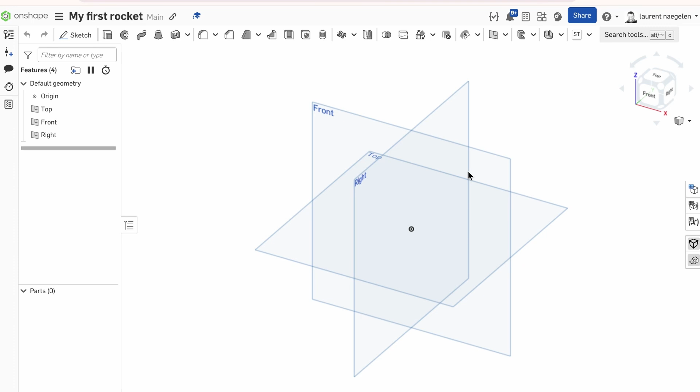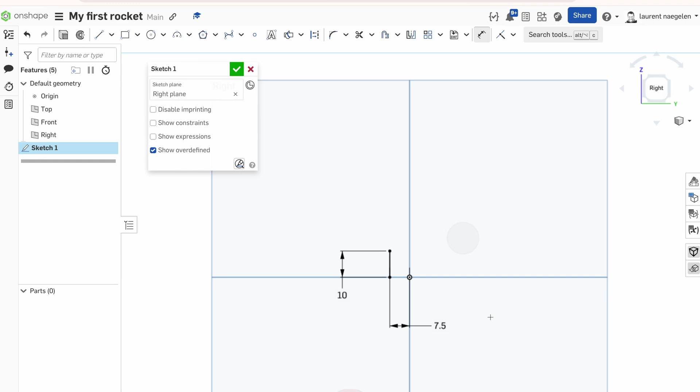Let's create a new Onshape document. First, draw the profile of the rocket body in a new sketch. Put a height limit to the body with a horizontal construction line.

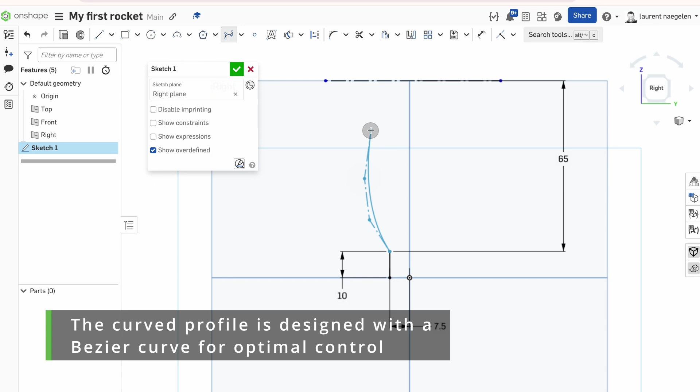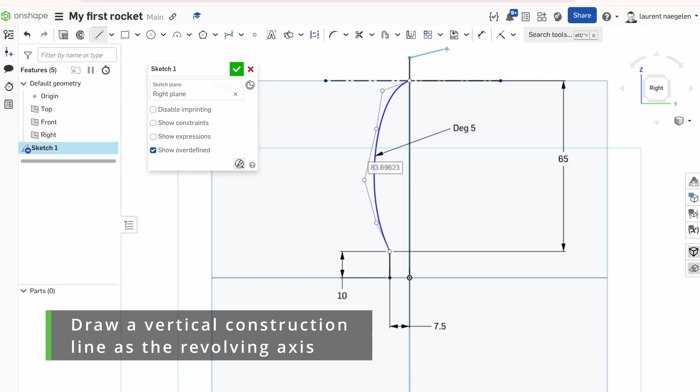The curved profile is designed with a Bezier curve for optimal control. Draw a vertical construction line as the revolving axis. We use a thin revolve function to create the rocket body.

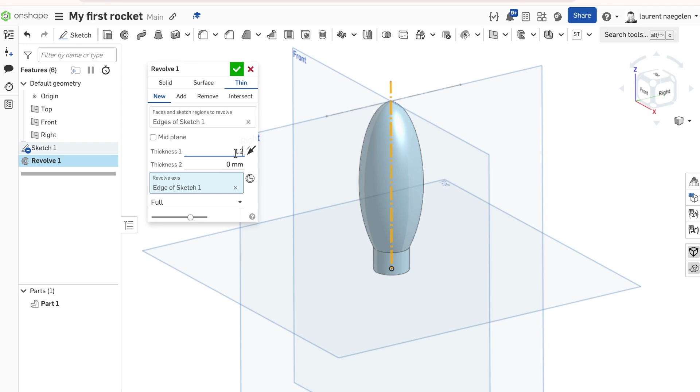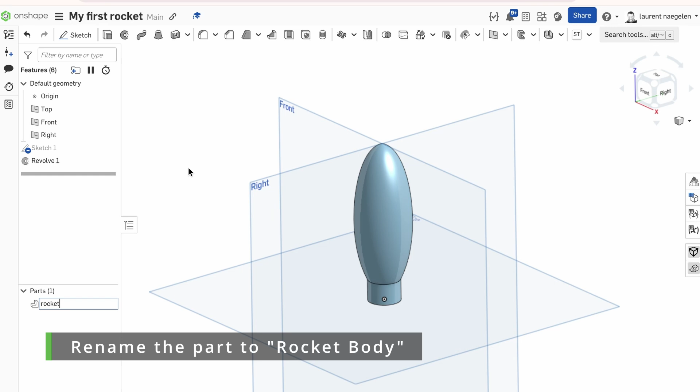You can adjust the body profile anytime by editing the sketch. Rename the part to Rocket Body. And change the color.

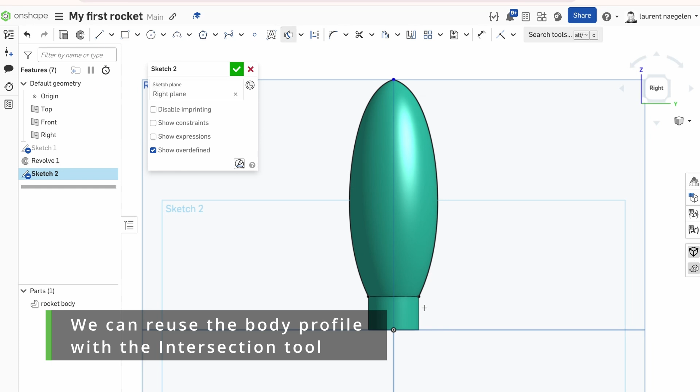Now let's create the fins. We can reuse the body profile with the intersection tool. We start with regular fins profiles and improve them later. Once the profile is defined, we use an extrude function to add the fins to the body.

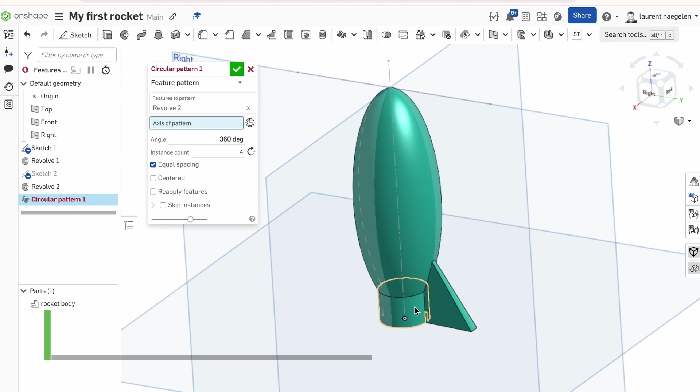Using a circular pattern, we copy the fin around the body. Using Onshape's unique multi-part studio feature, we are creating the base in reference to the body.

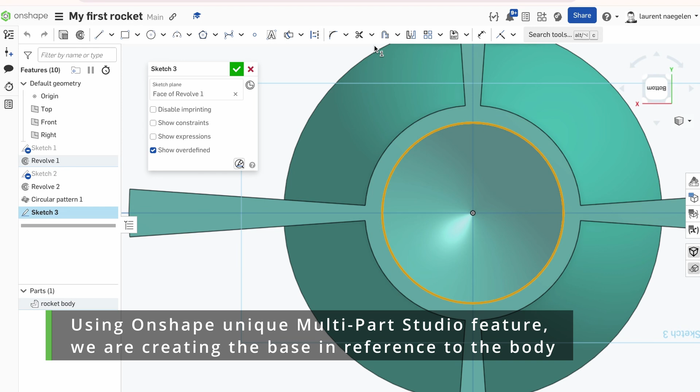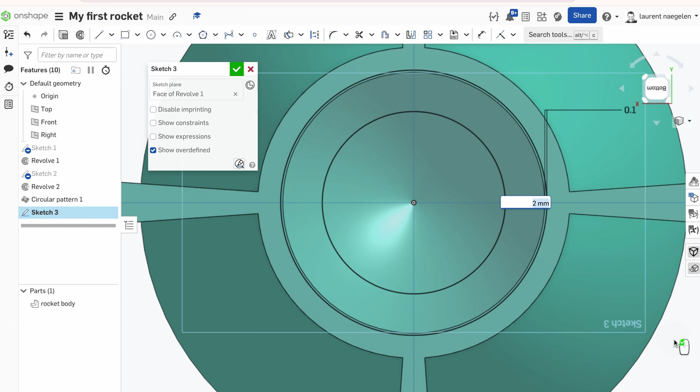Offset the exhaust circle with a starting value of 0.1 millimeter. Then offset the result to create the base pin profile. Extrude the profile in two directions to create the pin.

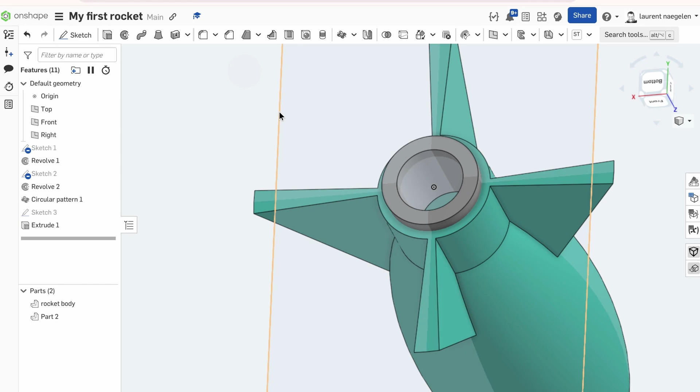Rename the part and change the color. Create a stable base.

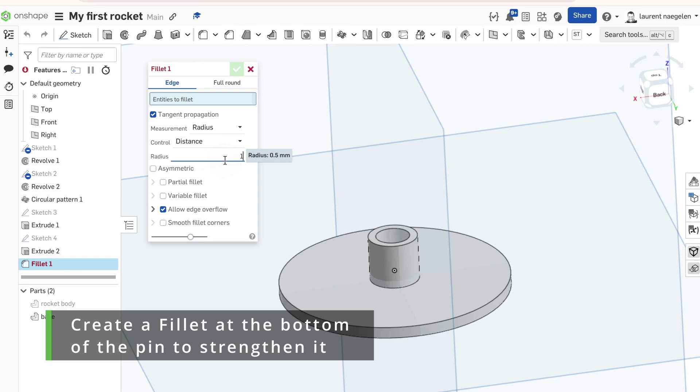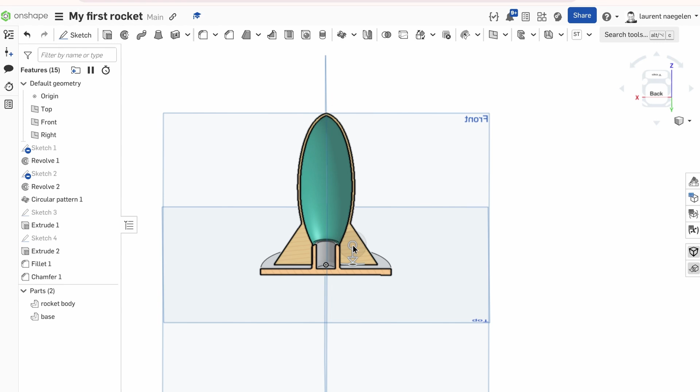Create a fillet at the bottom of the pin to strengthen it. Create a chamfer on the pin's top edge to facilitate the connection to the body. In this section view, we can observe the tight fit between the base and the body exhaust area.

Congrats! Your CO2 rocket is done and ready to fly. Pro tip: you can use one round of surgical tape around the base pin to fine-tune the fit.